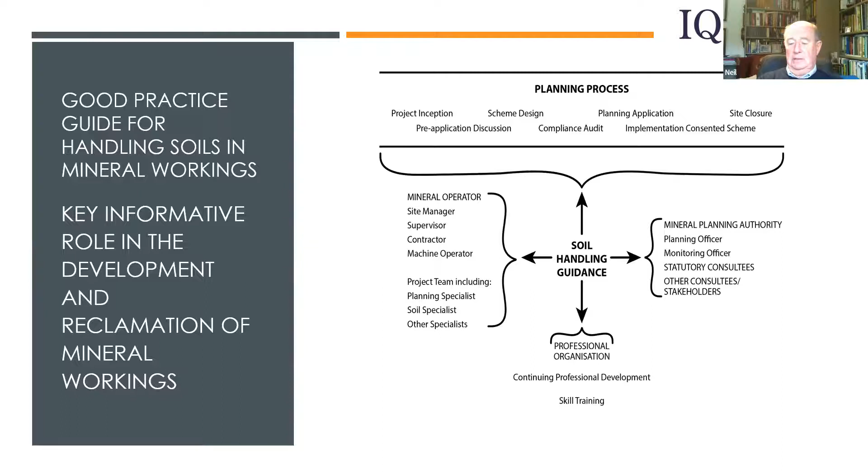The guidance has a key informative role from project inception to site closure in mineral development and reclamation. And as you can see from this diagram, it involves all stakeholders as well as the complete planning process. The guidance is in two parts. Part 1 introduces the issues and choices. Part 2 provides model methods. The guidance does not specify the equipment, as this is a matter for operators to decide.

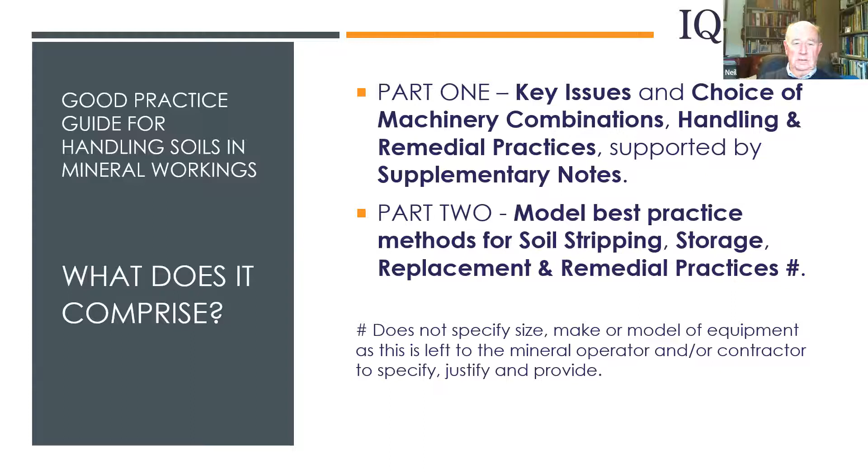Part 1 addresses a number of key issues, such as the need for a soil resource and management plan, dealing with and avoiding soil compaction, and the sort of planning conditions and controls that may be necessary, along with the other matters that are in this slide. In Part 1, the issues are considered in a number of contexts for choosing machinery and practices, which are also listed on this slide, but include things like the common practices used, the risks in using particular machinery, and remedial treatments that are necessary.

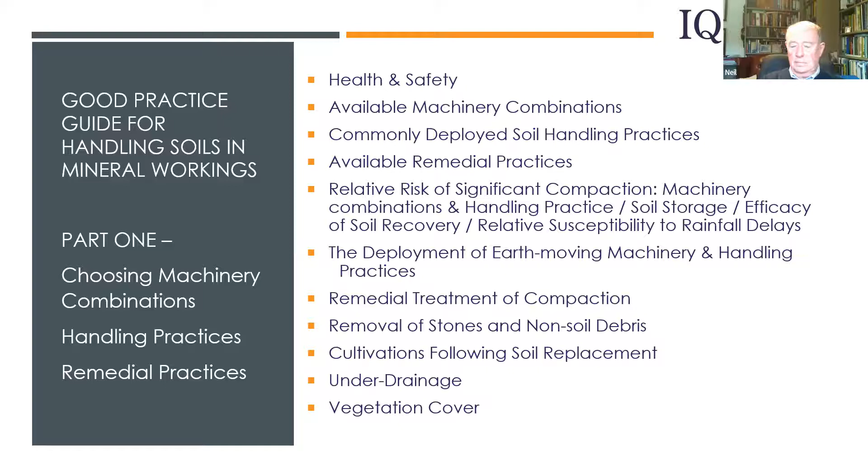Supplementary notes are also provided to expand the background and advice for soil-related topics such as soils, the nature of compaction, occurrence of compaction, but also soil wetness, as well as soil mixing and other things that you can see in this. Part 2 provides model methods, which incorporate advice on the advantages and disadvantages of the choices, the suitability of the choice. Operational advice is also given, as well as illustrations and further informative boxes.

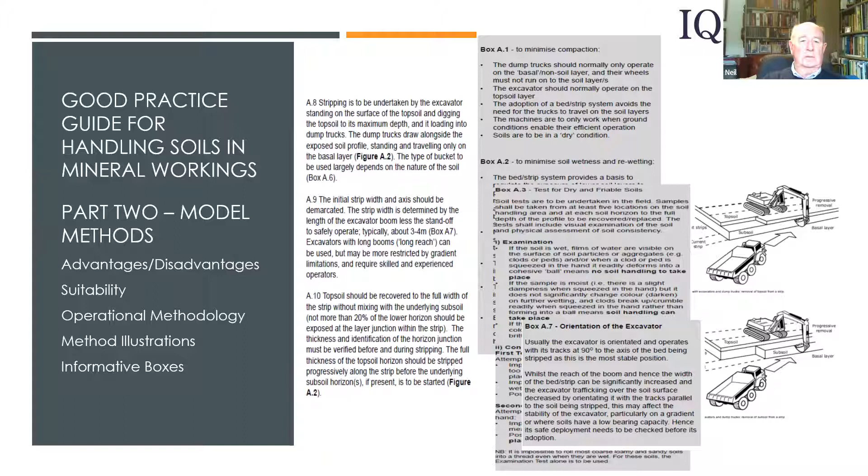Key updates are provided in the guidance. In part 1, the foundation and underpinning of the new guidance is the Soil Resource and Management Plan, or SRMP. It has a key role from project inception to site closure in development and reclamation, and involves all stakeholders. You'll have seen this diagram first of all with the guidance. See that the Soil Resource and Management Plan replicates that position, that function.

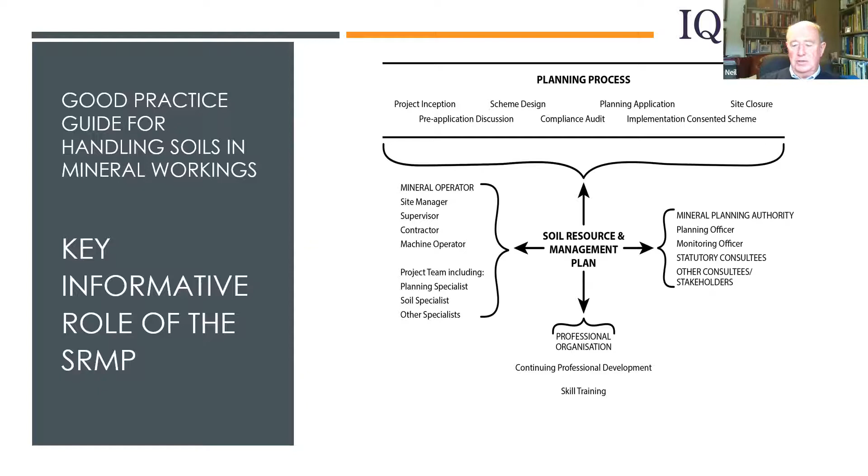SRMP is important in conserving soil resources, and delivering the intended land uses and ecosystem and environmental services, as well as compliance with the planning policies and consents, and hence is a requisite for all schemes. Soil compaction is a commonly occurring problem caused by the choice of soil handling practice and machinery. The SRMP is to specify the rationale for choice of machinery and practice to minimise and remedy compaction. And the expectation is that operators conform to what is provided in the SRMP. Monitoring and reporting is an integral part of the SRMP.

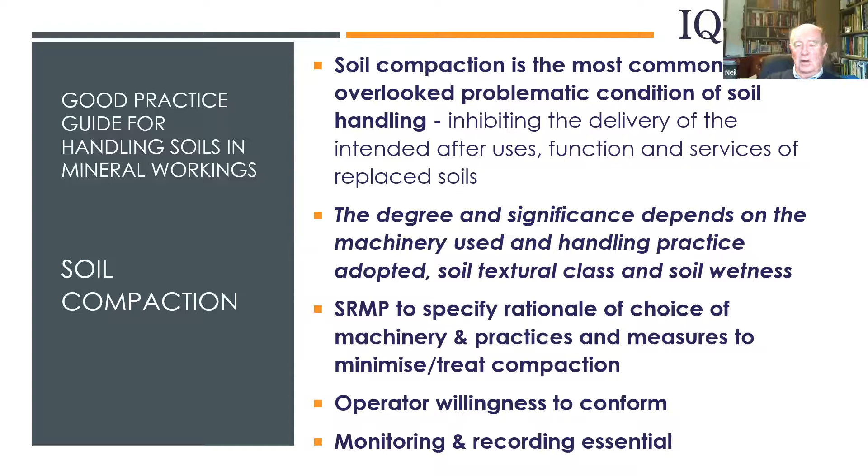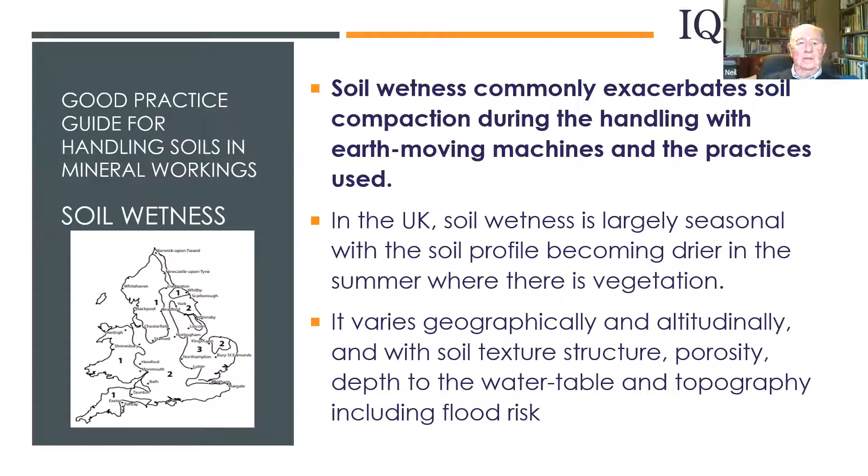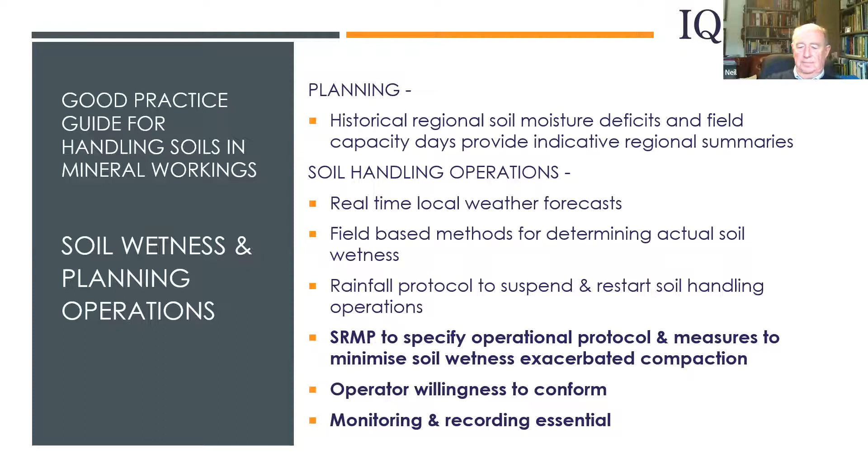Soil wetness exacerbates soil compaction during handling. Soil wetness can vary seasonally, geographically, with soil types and textures, depth to water table, occurrence of flooding. And the SRMP is to specify the planning and protocol to avoid or minimise the adverse effects of soil wetness. And again, the expectation is that the operators conform to what is in the SRMP. And again, monitoring and reporting are integral to this. Hence, a risk approach is provided in the guidance for the choice of machinery and practices, covering stripping, storage and replacement, soil types and soil wetness condition. It also provides advice for archaeological sites.

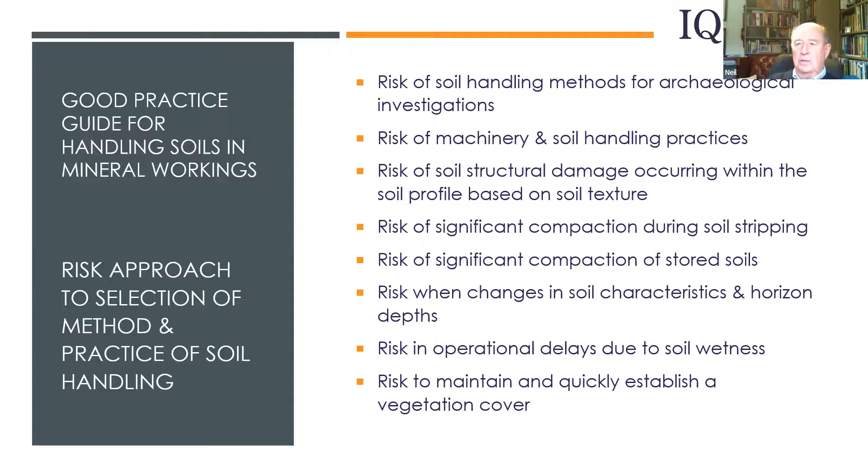Different soil textures have different inherent resistance to compaction, which influences the risk levels and restricts the choice of machinery and practices. For example, for lower risk soils, there are 3 options for sandy and sandy loam types of soils. Where there are sandy clay loams, there are 2 options, giving it a moderate risk of compaction. The high risk soils are the silty clay loams, the clays, the peaty organic soils. And here there is just one option when dealing with those soil types.

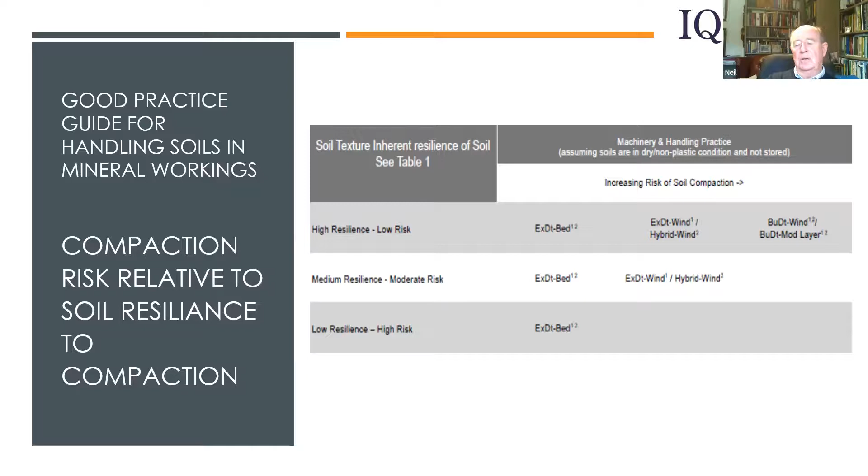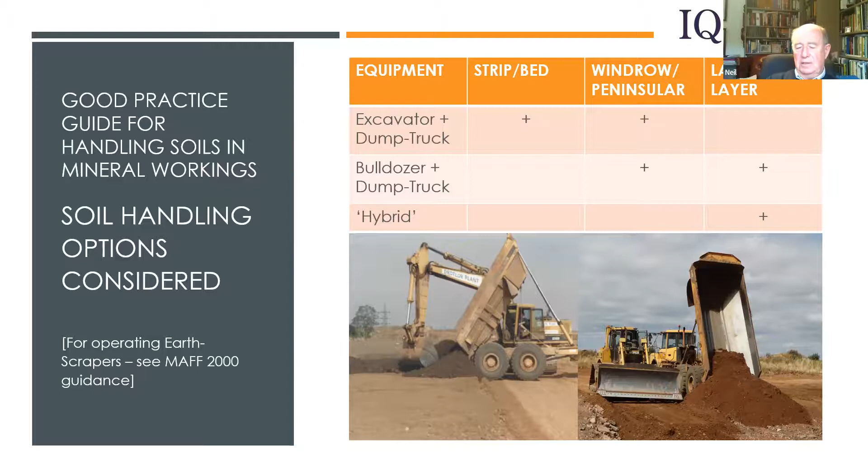I'd like to cover some key updates in part 2 of the guidance. Well, there are 5 machinery practices provided. The standalone sheet format that was in the MAFF guidance is retained, with additional advice on suitability. Earth scrapers are not recommended, and you'd have to go back to the MAFF guidance regarding their use. The updated methods cover the commonly used windrow and hybrid practices, and they're covered by the various sheets that are given in this slide.

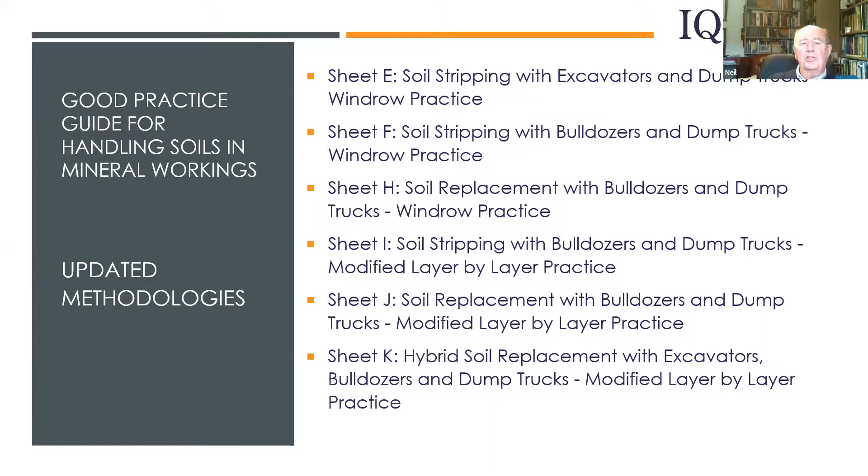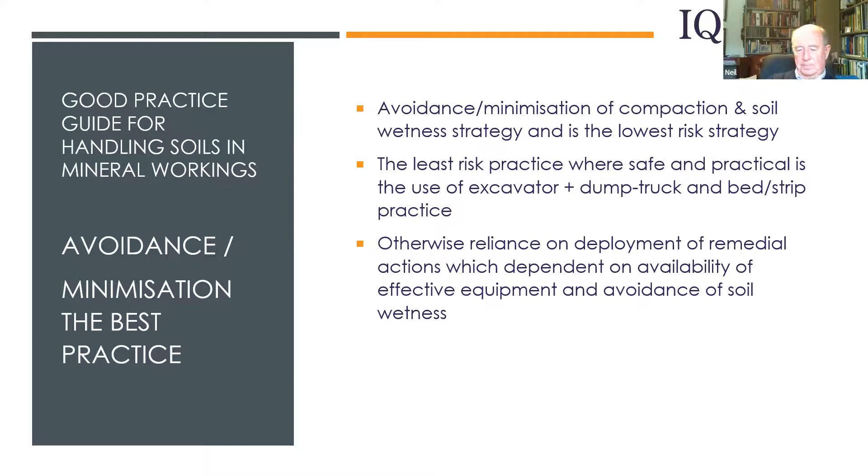Avoidance and minimisation is the lowest risk strategy, and for this, excavator and dump truck with the bed strip practice is the least risk and considered the best practice overall. All others rely on riskier remediation actions depending on the availability and the effectiveness of equipment, as well as the soils being in a dry condition. Remedial options are now integrated into the soil replacement methodologies, and as such should be an integral part of the practice option if chosen.

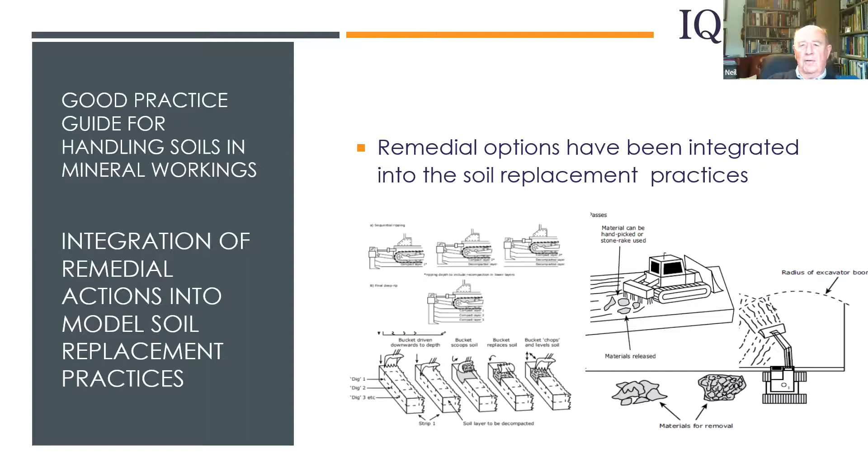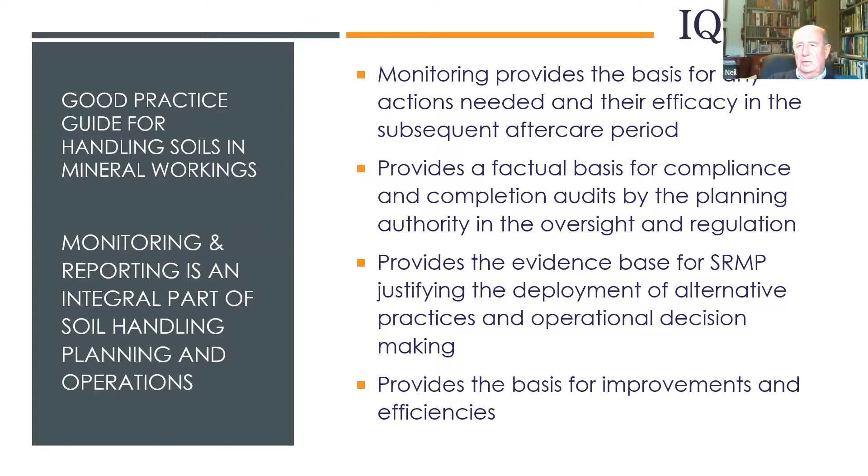Monitoring is often overlooked and dismissed, but it too is an integral part of the SRMP and of course good practice. It's important in providing the evidence of achieving the land use and reclamation objectives and also compliance. Providing evidence to justify alternative choices of machinery and practice is obviously dependent on monitoring as well. And of course, it is a way that practices can be improved overall.

Ongoing development: well, we hope and we would expect that such guidance would be under continuous development. And to help in achieving this, there's feedback that can be provided via the Institute of Quarrying webpage link, but also the steering group will be retained to review and update guidance according to experiences on an annual basis. Training workshops and seminars will be developed and provided. And the guidance is expected to be expanded maybe to other methodologies for habitat translocation and so on. And perhaps a digital animated training version could also be developed to assist.